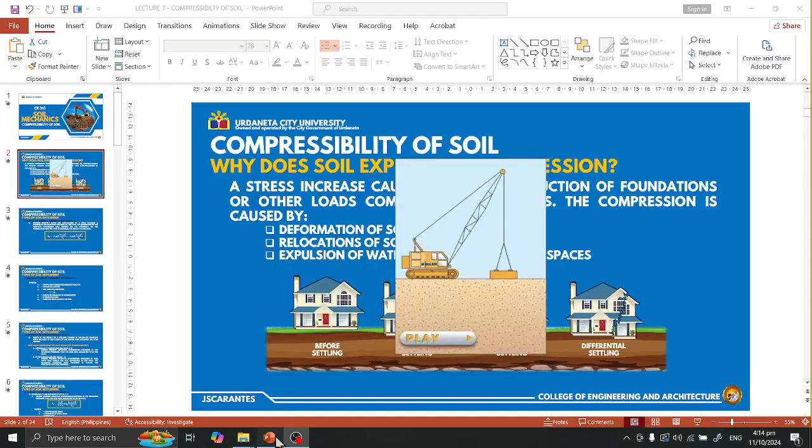For this lecture video, we'll be discussing the compressibility of soil. But before we proceed to the different formulas involved in this topic, let's have a bit of introduction first.

Why does soil experience compression? A stress increase caused by the construction of foundations or other loads compress soil layers? To this day, yes, all of our structures—highways, buildings, bridges, even skyscrapers—stand on soil. And according to this, there are three reasons why compression happens.

First, the deformation of soil particles. We can compare this to our stress-strain relationship. Whenever a material is exposed to loading, like in strain, it can be compression or tension. However, in soil, compression is more prominent.

So for example, this is our soil particle. Once you put a load on it, it can cause deformation, similar to our formula PL over AE. All the loads from the building are carried by the soil, and it's the soil particles that bear the most weight.

So by the way, pag yung sinasabi kong settlement, no, for example, sa ating figure na lang, or sa ating video playback kanina, so yung tinutukoy ko sa settlement, so ito yung mismong paglubog ng lupa dahil doon sa load, sa structure na kinakarga niyo, no. So yun yung tinutukoy natin.

So di ata ako makapag-annotate, so etong, palit ako ng kulay. So yan, yun yung tinutukoy natin actually as settlement, no? Pero dito is para siya kay dynamic compaction. So ito yung settlement na in-induce na natin, parang ganun siya.

So the magnitude of the contact settlement, so possible din daw maka-affect yung flexibility of the foundation and the type of material on which it is resting.

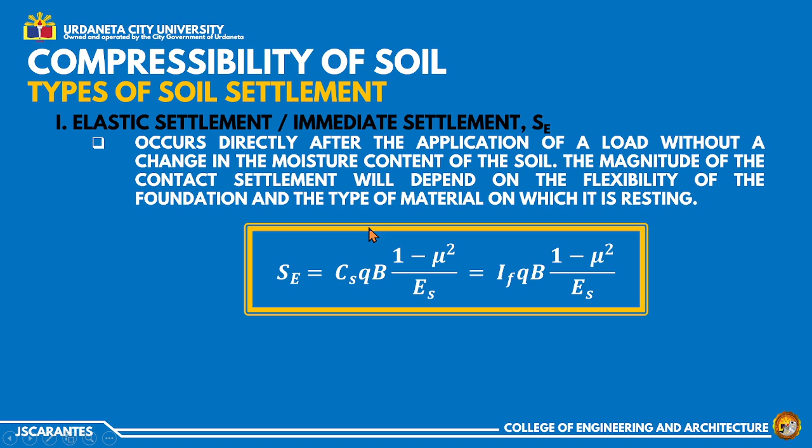Meron tayong dalawang formula para kay S sub E or the elastic settlement. So magkamukha lang naman sila, no? Actually isa lang yung pagkakaiba nilang parameter. So etong una, ang gamit CS. Yung pangalawa, ang gamit naman is IF. By the way, yung ibig sabihin ng mga notations na yan, so nandito siya sa ating next slide.

So for the CS, ito ay the shape and foundation rigidity factor. Samantalang si IF, ito naman si influence factor. So sa mga problems involving this settlement, actually common naman binibigay, so binibigyan na lang sa problem itong CS and IF. It is either given or siya yung hinahanap. So possible ganun yung mga nature ng problems natin dito, no?

And then for the Q, it is the net vertical pressure. So dito, so basically pressure lang din siya. Stress. Pagdating kay stress, di ba, ang formula natin, that's P over A. So si P dyan, yan yung P na nandito.

And then ito si B squared. So pwede natin sabihin, yan yung ating area. Pagdating kasi doon sa ating mga footings, so ang common naman na shape niya ay square footings. So minsan, kapag nagkakaroon ng overlap, so ginagawang rectangular footing. Pero dito no, yung B squared dito, para lang siyang area ng squared, so side times side, B squared. Wherein yung ating B, so it is the width or the diameter of the foundation.

So personally, no, wala pa naman akong nakikitang diameter ang ginagamit, meaning circular yung ating footing. So at least, sa mga nakikita ko pa lang so far, wala pa akong nakikitang circular. So common talaga dito sa atin, square and rectangular footing. So meron naman mga ano, siguro trapezoidal, pero hindi sila masyadong common, no? So yun yung mga ano, special cases na lang siguro nangyayari or ginagawa.

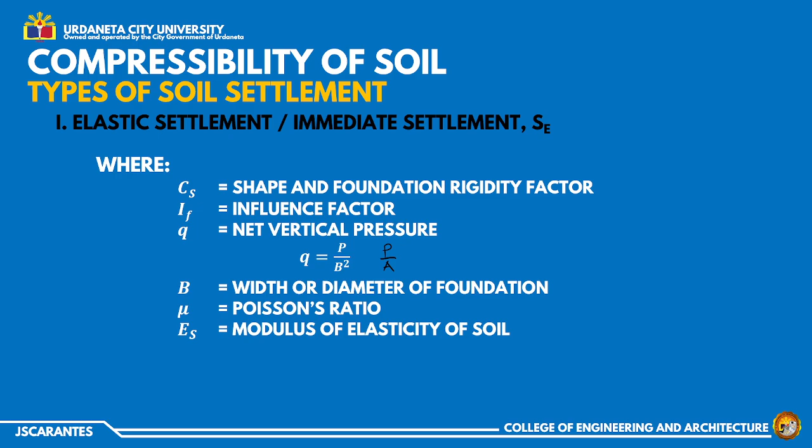So yun yung ating Poisson's ratio, and then E, modulus of elasticity. So dito, meron lang siyang subscript na S to indicate na it is for the soil. Pero yung E natin, doon sa formula na, yung PL over AE, so yung E doon, modulus of elasticity. Parang ganun din dito, basically meron pa rin application doon sa strength of deformable bodies. So yun yung ating elastic settlement.

So next type is the primary consolidation settlement. So S sub P naman ang gagamitin natin para dito na notation. Ang primary consolidation settlement naman, so from the word primary, so basically ito yung pinakamalaki ang value usually doon sa tatlong klase natin ng settlement.

And it is a result of the volume change in saturated cohesive soils because of the expulsion of water that occupies the void spaces. Sabi natin sa ating first slide, so ang main reason bakit din nagkakaroon ng compression ng ating soil ay dahil doon sa expulsion of water. Actually, yung expulsion of water na yun, yung compression na napoproduce doon, tawag natin siya si primary consolidation settlement. And we have two basic definitions of clays based on stress history.

The first is normally consolidated, wherein our OCR, the over-consolidation ratio—don't worry, we have the formula on later slides—the OCR is less than or equal to 1, so we consider it normally consolidated. The definition is: those whose present effective overburden pressure is the maximum pressure that the soil was subjected to in the past.

Meanwhile, over-consolidated is when the value of the over-consolidation ratio or OCR is greater than 1. Those whose present effective overburden pressure is less than that which the soil experienced in the past. So the maximum past effective pressure is called the pre-consolidation pressure.

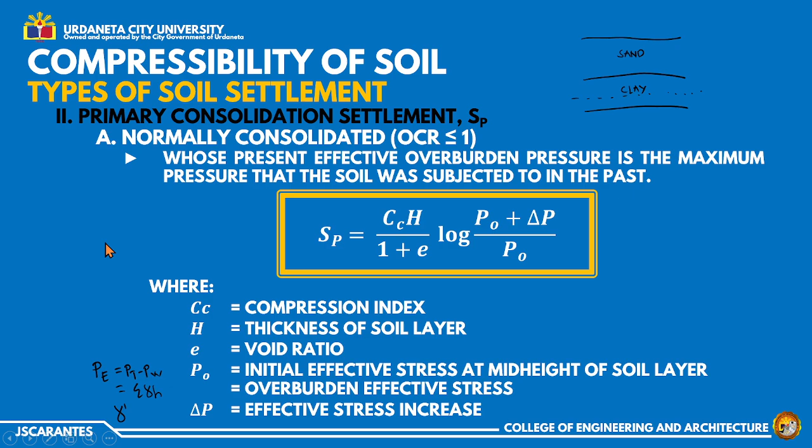And then delta P, the stress increase. So that's added to the increase in our effective stress, delta P. Notice that it's added to our present or effective overburden pressure. So that's our normally consolidated case.

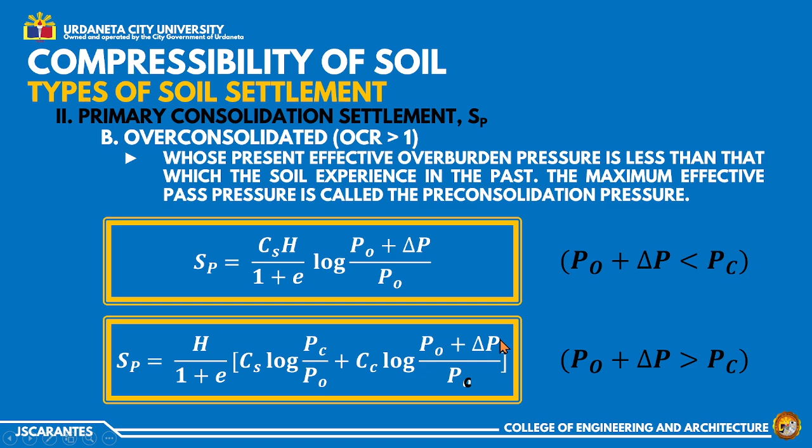As for the meaning of the parameters: CS is the swell index, not the shape and foundation rigidity factor. CC is the compression index. H is still thickness, e is void ratio. PC is the pre-consolidation pressure or stress. PO remains the same, and delta P is still the increase in effective stress.

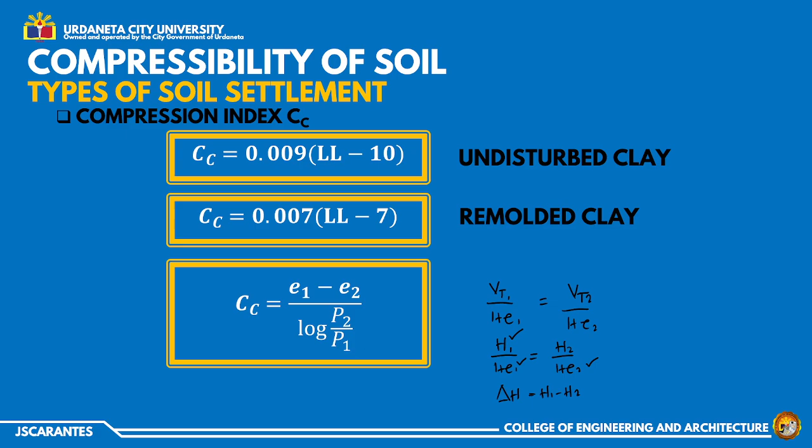So next is our swell index, CS. CS has a range of 10 to 20% of the compression index. However, if it's not given in the problem or not stated, we'll use the maximum value in that range, which is 20%. So CC divided by 5.

That's 20% of CC. And then for the over-consolidation ratio, OCR, that's our past divided by the present maximum pressure. So that's our OCR, PC over PO.

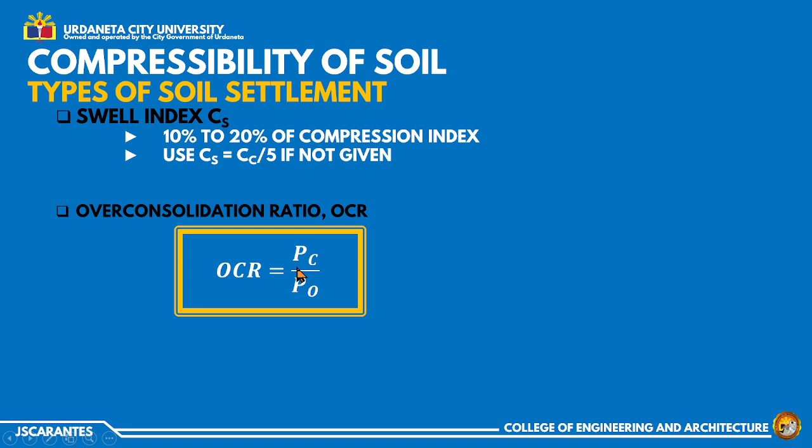And then for the last type of our settlement, we have the secondary consolidation settlement. The notation we'll use for it is S sub S. This is secondary consolidation settlement, and it is a result of the plastic adjustment of soil fabrics.

So basically, if we relate this, in structural terms we use the concept of creep. Creep is deformation due to sustained loads that a structural member or material is carrying. It's the same here - because of the constant weight of the structure carried by the soil, it produces plastic adjustment causing settlement.

So here's our formula for secondary settlement: CA times H over 1 plus E sub P, logarithm of T2 over T1. CA is what we call the secondary compression index.

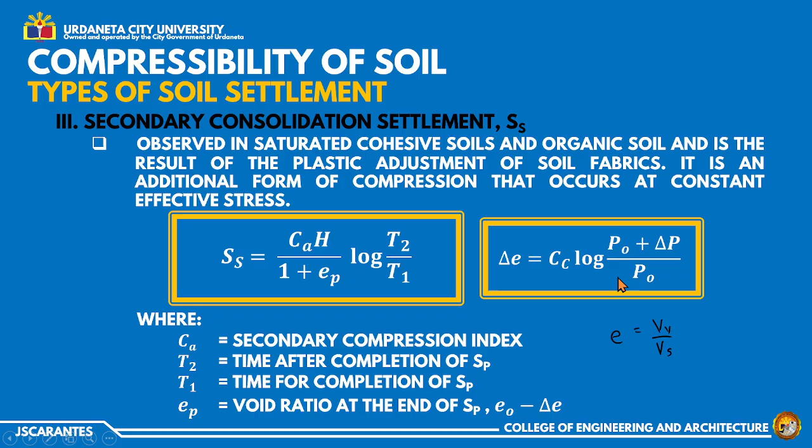Now let's go to our delta P. When we say delta P, that's our increase in the vertical stress or effective stress increase - this is what we add to our PO. It's the average increase in pressure below the center of foundation. This is actually an application of our rectangular stress distribution.

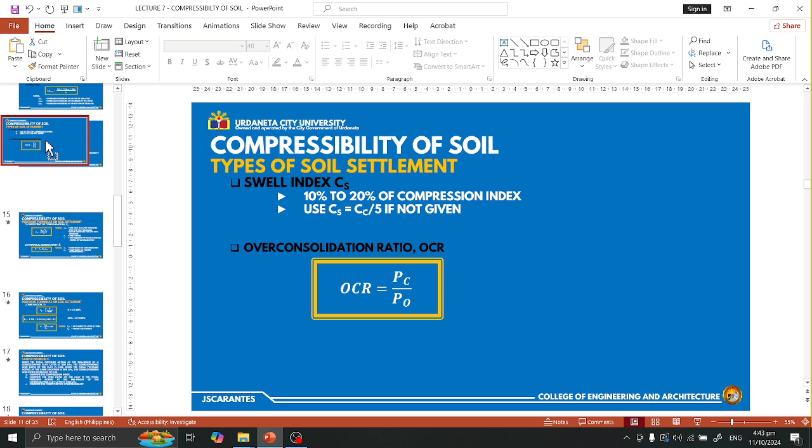Let me check if I have a blank slide to insert here so we can try drawing. Just skip the annotation, let me duplicate this, then remove this. So for delta P, let's say we're drawing a footing here - say we have a footing.